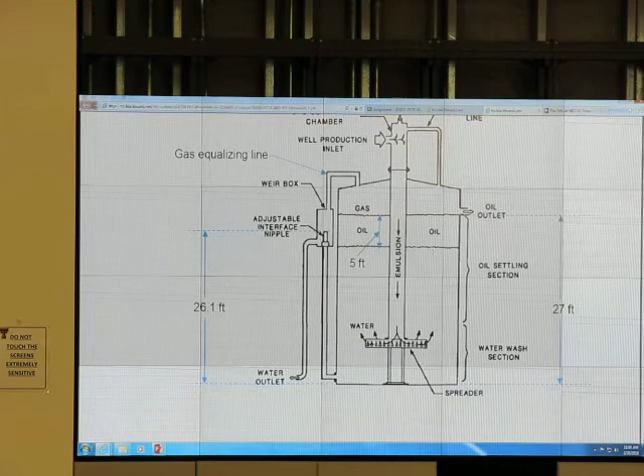This is not exactly the same as last year's exam, but last year's exam solution is available. So this time I add a gas equalizing line. Second problem: the gas equalizing line gets plugged. And we calculate oil height or something.

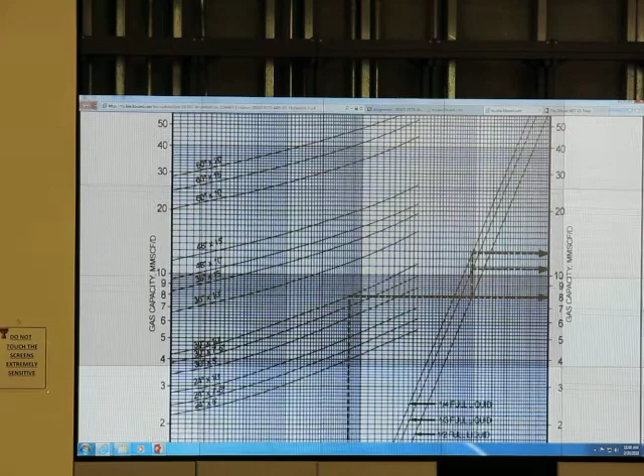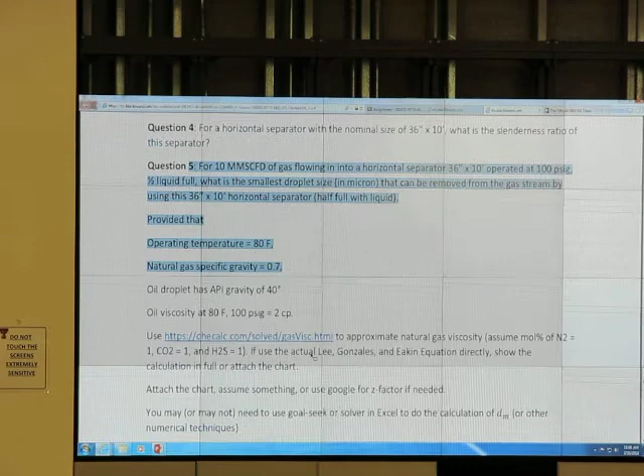Next one is about using the chart. This can be done very quick. The last one, number 4, let's calculate slenderness ratio very quick. The last one is somewhat difficult, but it's similar to what we have in class. Each question is worth 2.4. If you get more than 10, your score caps at 10.

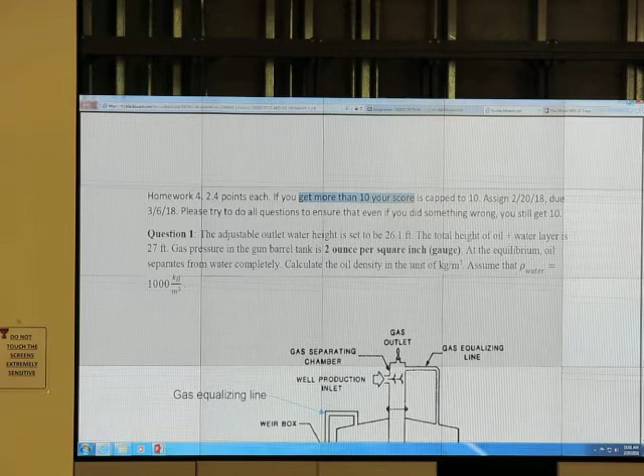Okay, good. Who missed the field trip? Everyone went to the field trip, right?

Last time I made a mistake talking about how to do this BS&W. When we add toluene in, we have to shake first. When we shake, we spin it. The one with high density goes to the bottom, the low density goes to the top. It doesn't mix by itself.

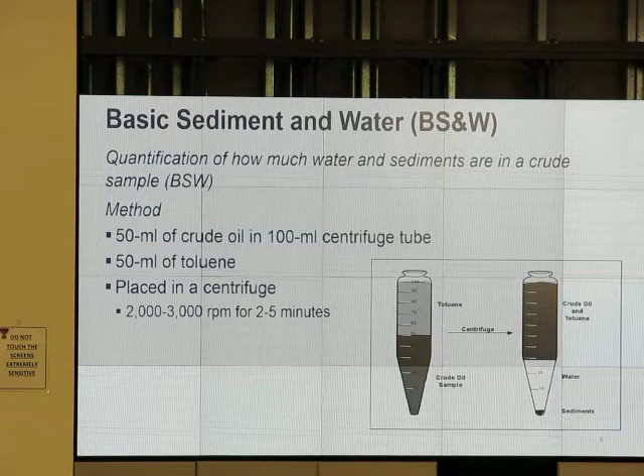The reason we don't use water is because water doesn't decrease the viscosity of the crude oil. But toluene mixes very well with crude oil and decreases the viscosity, making these things separate quickly. So we can use toluene, hexane, and something else.

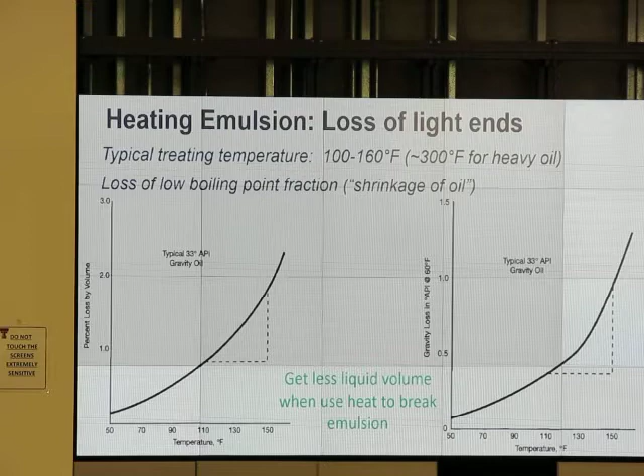In NYMEX rulebooks, New York Mercantile Exchange, the blend of West Texas Intermediate, North Texas Sweet, Oklahoma Sweet, South Texas Sweet shall have the Reid vapor pressure less than 9.5 psi at 100 Fahrenheit. So this is for safety when we ship this crude oil by train.

This is for safety purpose. This is not the rule, okay, but it comes from the crude oil contract. If we have Reid vapor pressure more than that, they don't buy it. Reid vapor pressure has to be less than that.

What is that about, 9.5 psi? I Googled it and found that they heat it to 100 Fahrenheit, heat it to 100 Fahrenheit, and if the vapor pressure is less than 9.5 psia, it is okay.

Please recall that when vapor pressure equals 1 atm, that is where the liquid phase reaches the boiling point. For example, if water vapor pressure equals 1 atm, it is boiling. So that's Reid vapor pressure.

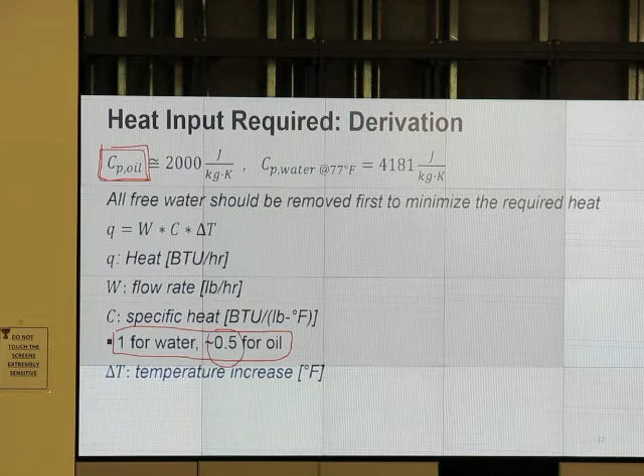CP? Specific heat capacity, correct. So for water, it's 1 BTU per pound per Fahrenheit, but for oil it's 0.5 BTU per pound per Fahrenheit, right? So that's why we have 0.5.

And we have oil flow rate. Is that oil flow rate? Yes, oil flow rate. And we have water flow rate.

Not flow rate, I'm sorry, heat that used for oil. That one is heat used for oil. That one is heat used for water. When I go back, capital Q, this is heat or flow rate, okay.

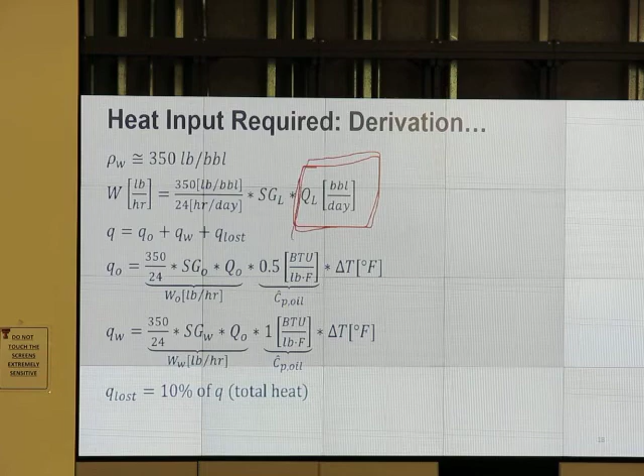I'm sorry, capital Q is flow rate, volumetric flow rate, barrel per day. That's capital Q. So we have volumetric flow rate for oil, volumetric flow rate for water.

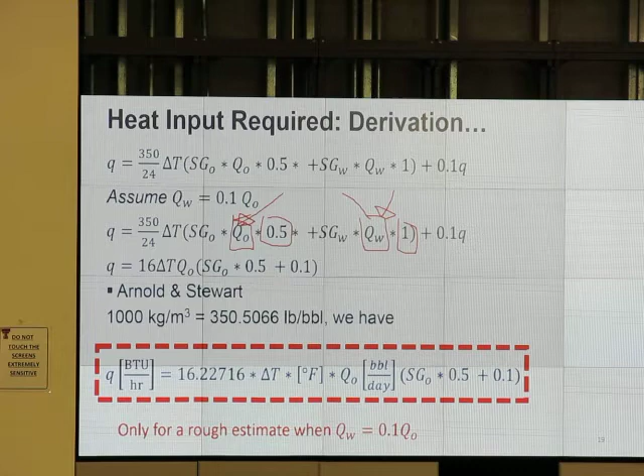Next, we want to combine that volumetric flow rate for oil and volumetric flow rate for water by using the water cut concept, volume fraction.

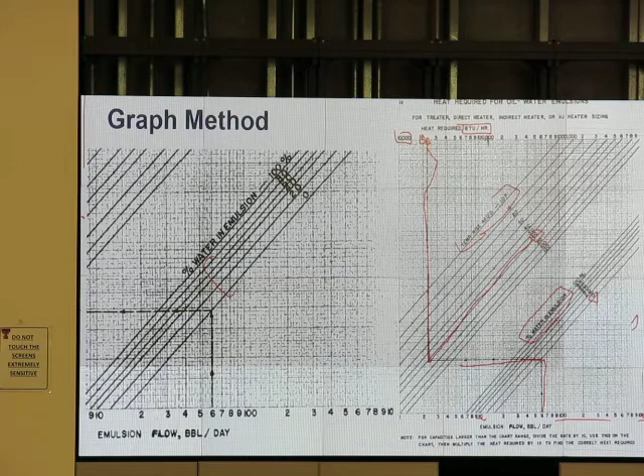Last year we had an exam on this, and the input flow rate was not 60, not 600, but like 2,000 or maybe 3,000 barrels per day. 3,000 barrels per day is beyond the chart - you see, the horizontal axis ends at 1,000. What do we do for 3,000?

Get in? No, I remember there's two people who get apples. Paul, you got an apple, right? Yeah, on Saturday.

How does it taste? It tastes good? Okay. So if I have a flow rate of 3,000 barrels per day, can I use this chart? Yes or no? You don't think so? Okay. Who else got an apple? Yes, you can. Yes, okay.

How do we do it? Note at the bottom: for capacity larger than the chart range, divide by 10. Everyone hear him? 3,000 - we divide it by 10 first, 3,000 becomes 300. Then we proceed as usual. When we get the result, we multiply by 10. For capacity larger than the chart range, divide the rate by 10, use this on the chart, then multiply the heat required by 10 to find the actual heat required. Last year when I printed the chart, I also included that statement, but students still couldn't do it. So this time I have to say it very clearly in class. So if it is beyond the chart, read the note, and then you can do it.

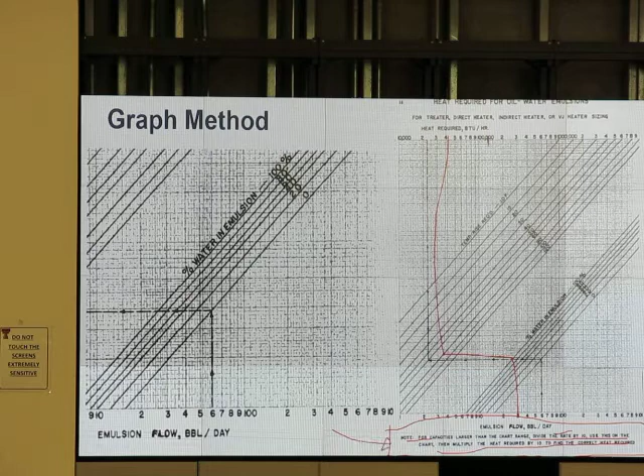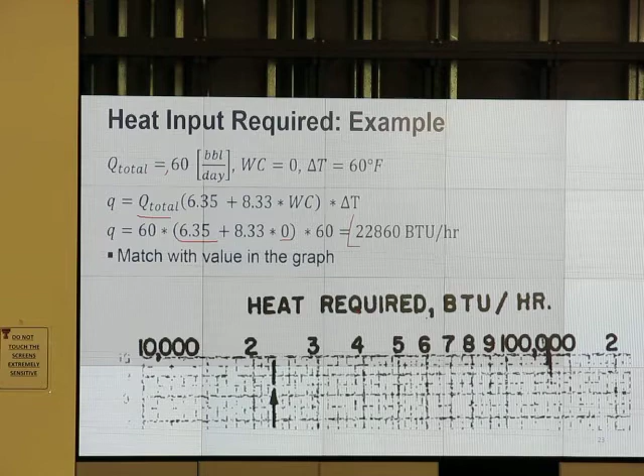Okay, that's the heat requirement based on the chart. Q total, I substitute the values: Q total for 60 barrels per day and water cut of 0, I get 22,800 BTU per hour, and on the chart I get about the same. Done - that's the heat requirement. How much do we heat?

For loose emulsion, we heat it to about 100 to 120. Moderate emulsion, maybe 120 to 140. Very tight emulsion, we heat it really hot. In addition to this requirement, this guideline, we may decide to heat it a little hotter to separate some light ends out so that we meet the Reid vapor pressure requirement of 9.5 psi at 100 F. You agree?

Even though we have loose emulsion, they may decide to heat it a little hotter than usual, so that when they sell the oil it doesn't have too much light end. If it has too much light end, the vapor pressure will be high, so they kind of remove the light end out. You got it? Yes, okay. In addition to this guideline, it may deviate from this because we may need to remove some light end to meet the true vapor pressure requirement.

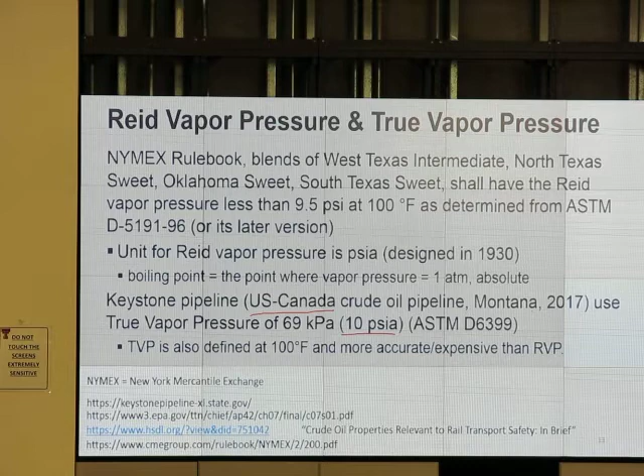Think about the true vapor pressure requirement. If you want to sell to Canada, that's Canadian oil, right? That we put - import oil from Canada - we use 10 psia, and this requirement of true vapor pressure is from 2017, it's new. But that guideline that you have is from many years ago. It also depends on what kind of treater we use. If we have a downdraft flow treater that has a lot of trays - if we have a lot of trays - some units don't have much tray.

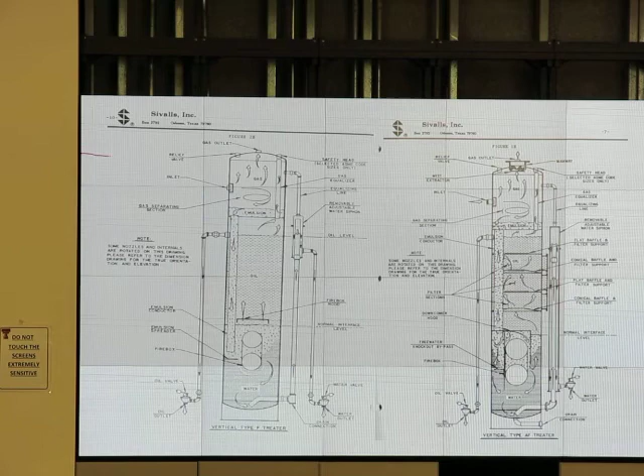So some units don't have much tray in here, but this one has more tray. This means oil will stay in there longer, it will stay inside longer. So we may not need to heat that much.

So she was saying, hey, if we buy a little more expensive unit instead of a regular unit, if we pay a little bit more and have the downflow treater, we don't have to heat much. We still get the same separation. Not needing to heat much is good, right? We don't have to pay for a big firebox rating, we don't have to use too much energy. So this is the benefit of the downflow treater.

So in addition to this guideline, it also depends on what is inside the separator. If there's a lot of tray, or some kind of special design, we may not need to heat that much.

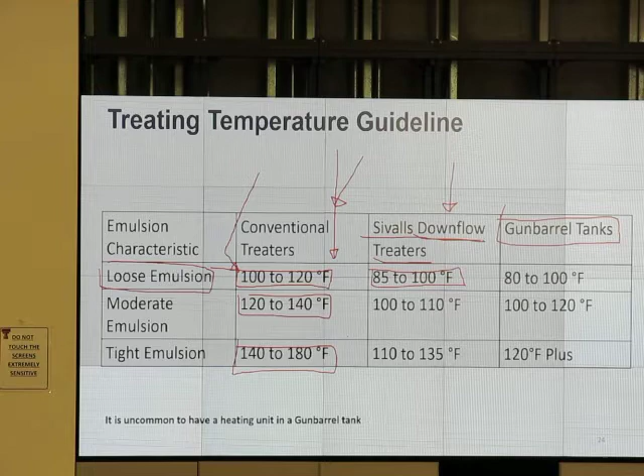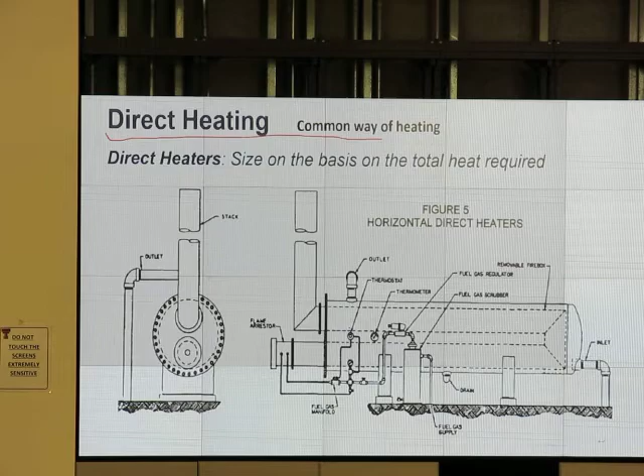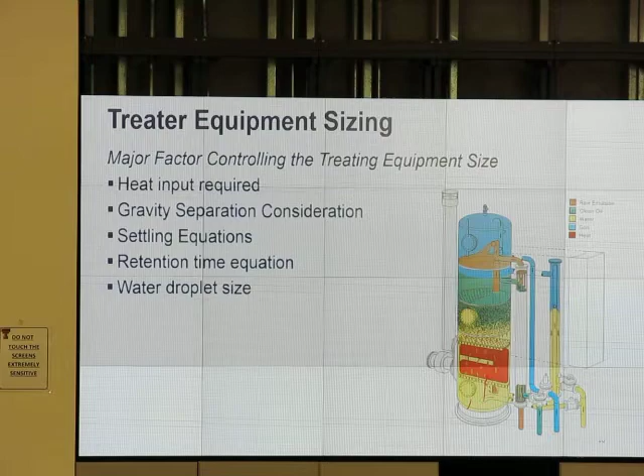Indirect heating is the same thing that we use in the line heater. We heat water first and use the water to heat the coil. That's indirect heating, so line heater is indirect heating. The common way of using a heating method for heater treater is direct heating. Of course, there are some uncommon ways of indirect heating.

Okay, Daniel, you got it, did you? Yeah. No? Okay. So why do I want to do indirect heating for emulsion? Any particular reason? Who has the answer? To have the answer, you may need to look in the next slide or something.

It's more corrosive, okay. Indirect heating, heater for corrosive fluid with cast iron coil. If the fluid is very corrosive, we may not be able to heat it directly. So we want to protect the heating element and protect the other part of the tank, so we have to use a cast iron coil, and we heat water first and use water to heat that oil.

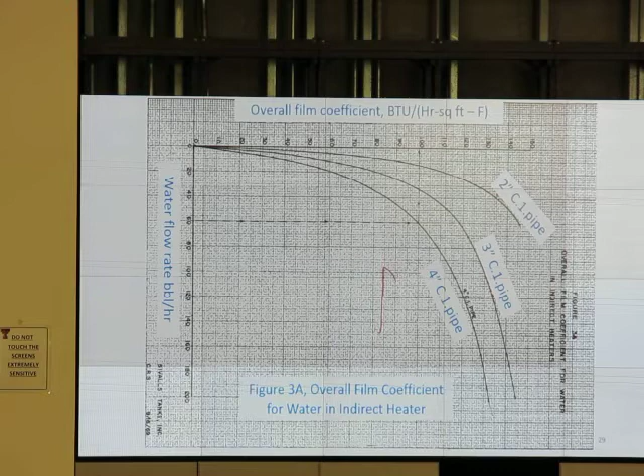So that's why there's a U value chart for oil film coefficient, and film coefficient for water. So we have a coil like what you have seen in heater treater, and we calculate the film coefficient and do the same thing that we did for heater treater. This is uncommon, it's not in the exam, but just so you know we can use cast iron and do indirect heating too. But the majority of units use direct heating.

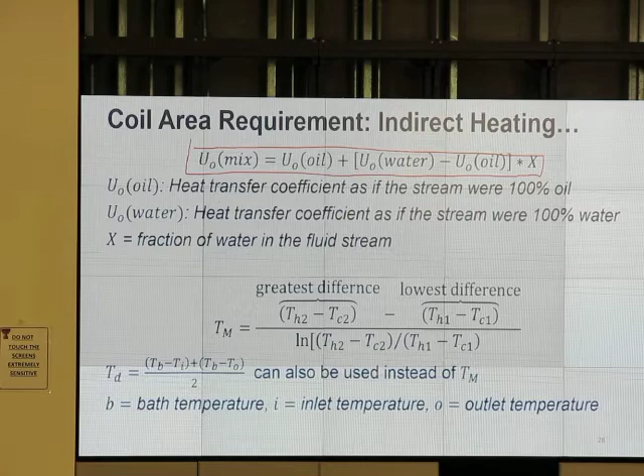And if the oil contains both oil and water, we use a chart to get the U value of oil, and a chart to get the U value of water, and then combine it using this. The rest of the calculation is the same as in heater treater. It's not in the exam, but just so you know. Direct heating, though, yes.

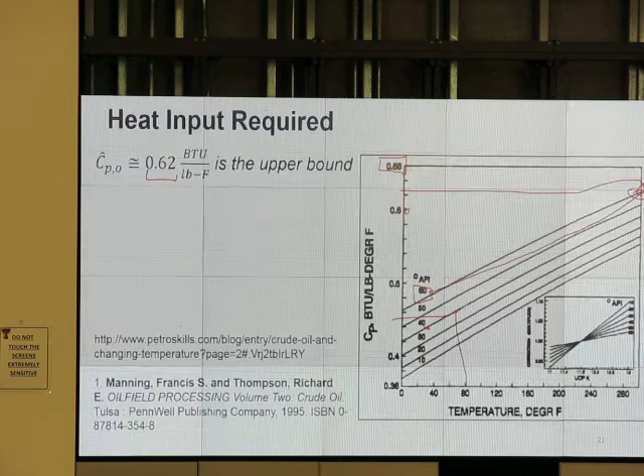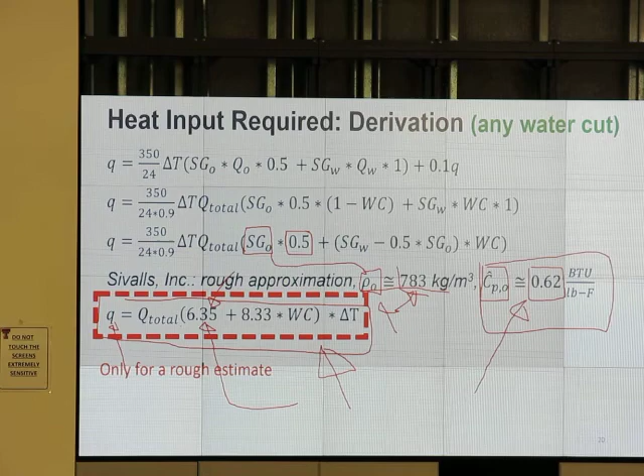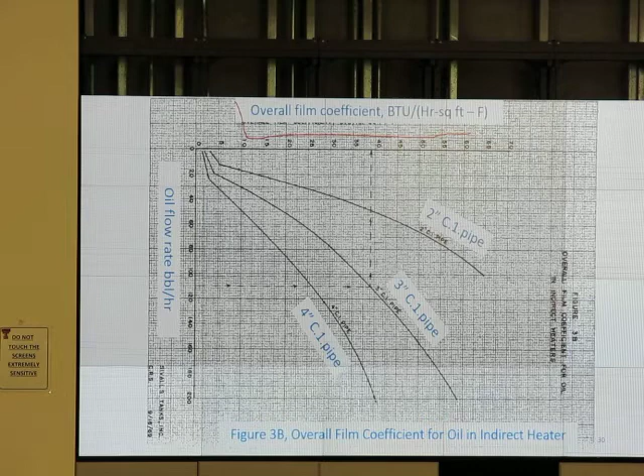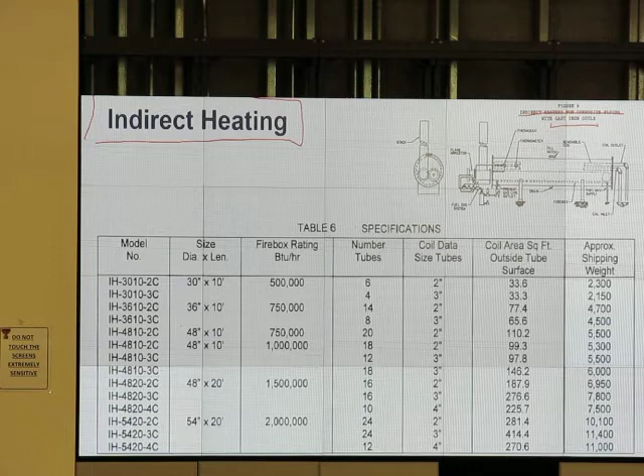Next part, coil area requirement for indirect heating. This is the same as heater treater, it's not common, so we skip. This part is film coefficient, also not common, so we skip. Indirect heating is similar to line heater. We typically don't do indirect heating unless it's corrosive fluid.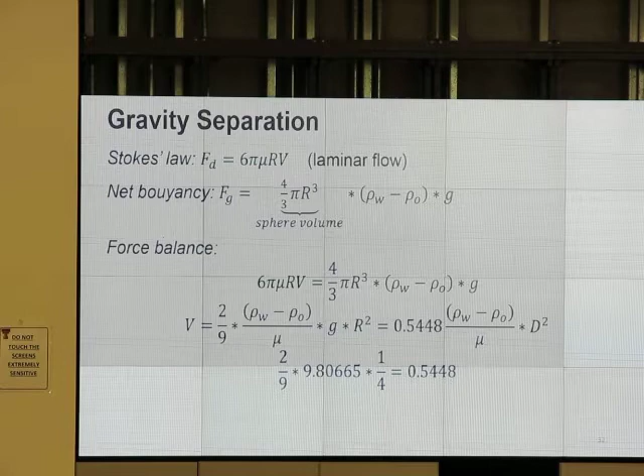Use the Stokes' law, net buoyancy. This is the same part as in the separator part, and eventually we get this value. This concept is also used in the heater-treater unit, to find out what is the speed it goes through if we want to do any kind of approximation. This is field unit, SI unit, field unit.

Settling equation for horizontal case. So in this case, water droplet sinking velocity equals oil phase moving up velocity. This is used for heater-treater. Look, they use the same equation, but it's a little different in derivation.

Okay, based on what is the cross-section area of the flow. So we have emulsion coming in, water, something. The derivation is the same concept. We don't have this in the exam, and you don't really use this one here, but it's already in the homework for the case of horizontal separator, if you recall.

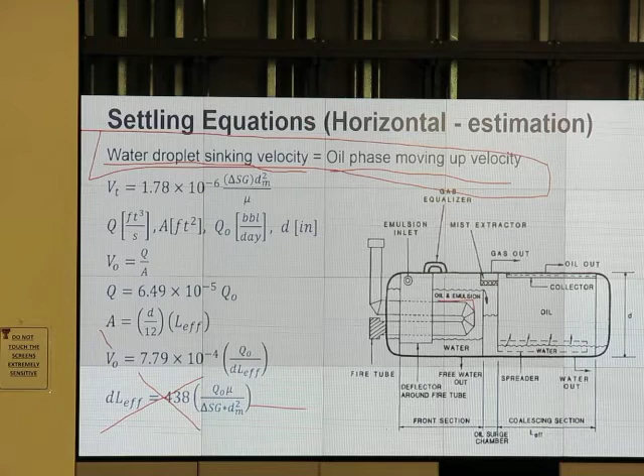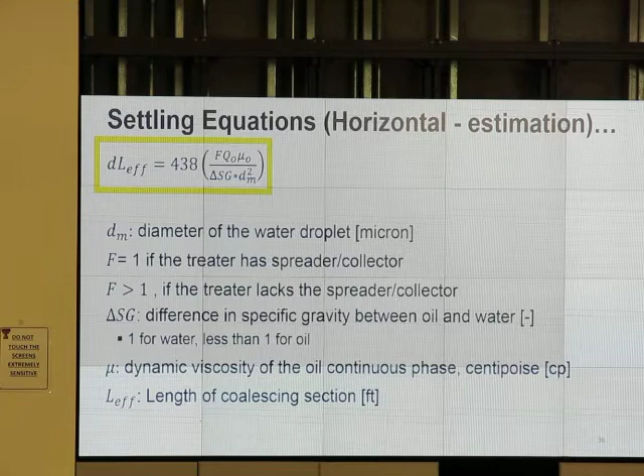Settling equation. For vertical estimation, this again, we just keep this for your information. We don't really use it in the exam or anything, but most of the time we use the chart.

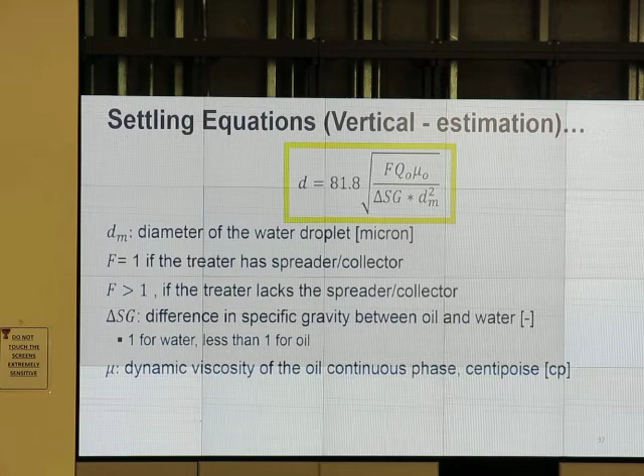Treater sizing. For vertical treater size or gun barrel, we can use this equation. This equation needs the information on viscosity. Previously we had the equation W Q equal to 3 point something plus H point something. That is for firebox rating, but it doesn't tell us about the size.

This thing tells us about the size. What size do we need? If we have vertical treater, what is the diameter that we need? If we have horizontal treater, what is the height and length? This equation is also used for gun barrel tank. The way to use it is W, our capacity, how much we want to put in. C, constant from the next table. The difference in specific gravity, we need to know viscosity.

Viscosity is in the unit of, what is viscosity? I think it's centipoise. And put everything in. Then we can get the W value.

This is a question for the case where we know the emulsion flow rate. Maybe 500 barrel per day, something. So that W, I think W is the same unit. In the exam I will tell you the unit, but here I just pick it up. So we have the diameter. When we know the flow rate, we know all three properties, we can tell what should be the size of the tank.

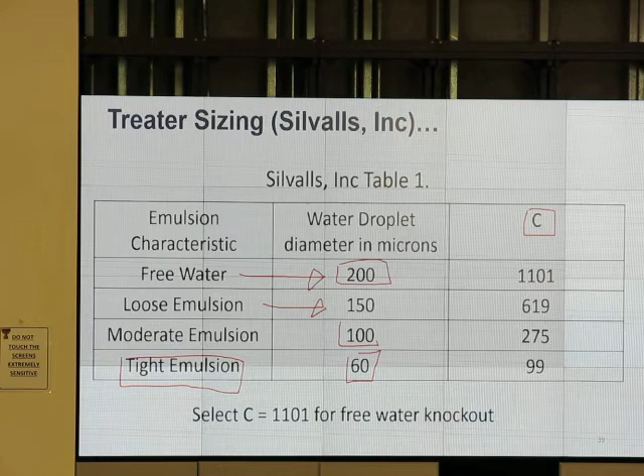So for the case of not-tight emulsion, having some free water or loose emulsion, it doesn't need much retention time. We can have a little smaller size. Okay, this is the way to do the calculation. W is the oil capacity variable.

Use mu W instead of mu O if water is the continuous phase. The part on the bottom is for the continuous phase viscosity. When we really do it, use a chart. That part is the equation used to make the chart. So this is for the actual estimation. We can use that for treater.

First step, we specify the specific gravity of the water that we have. Then we go up and read this part, gravity of oil, API at 60 Fahrenheit. What is the oil API gravity in this example? It's about 35. Then next step is what is the treater temperature? How much is the treater temperature? So we stop at about 140. We try to treat it at 140.

And then we go up and see what kind of emulsion: is this a loose emulsion, moderate emulsion, or tight emulsion? So moderate emulsion is that one, so we go up until moderate emulsion. Then we try to say, what size do we want to use? Do we want to use a 6 by 20? So this is the size of the treater. Then we stop at the size of treater, and we can tell how much is the oil capacity, or emulsion capacity, that it can handle.

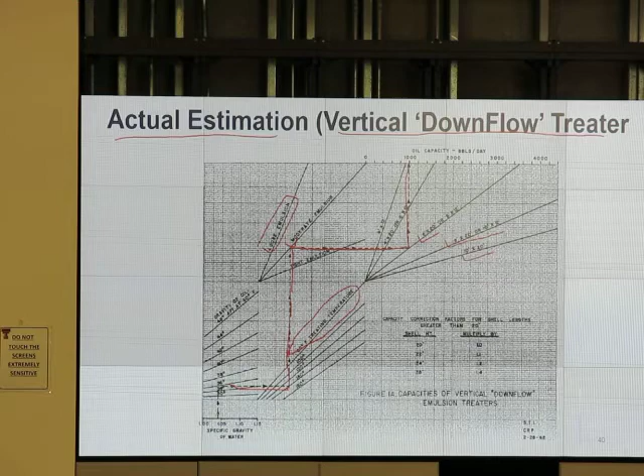Capacity correction factor for the shell length greater than 20 feet, we may have to multiply by some value. I put it here, alright, just use a chart. This is for vertical downflow chart. If we have a conventional model, use a conventional model chart, just follow the line.

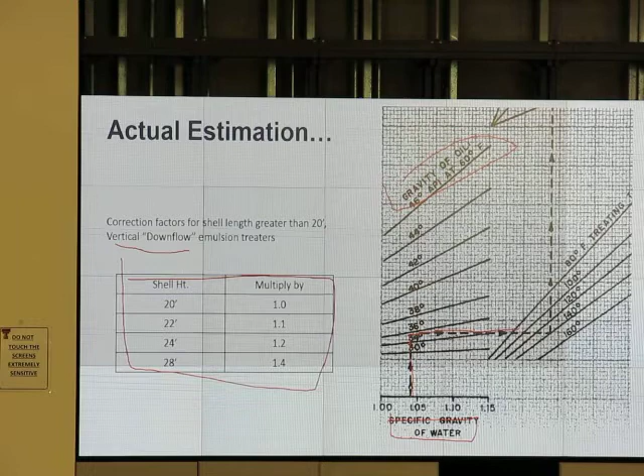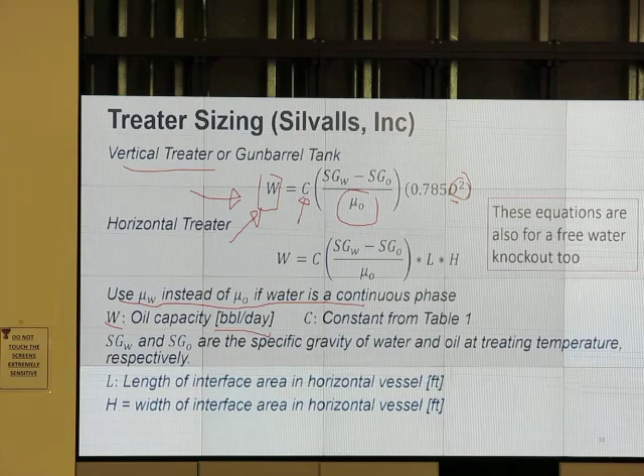Where do those lines in the chart come from? It is from this kind of equation. So when we have the equation, maybe one day you will be the one who makes the chart, not just use the chart. That's what it is, okay?

Go up, okay, moderate emulsion, turn right, and we have 6 by 20 feet. So if we have 6 by 20 feet, it can handle oil capacity of 1,000 barrels per day. If we have more than 1,000 barrels per day, let's say we have 1,500, we may need to use a bigger one, right? Good. This is how to size the separator.

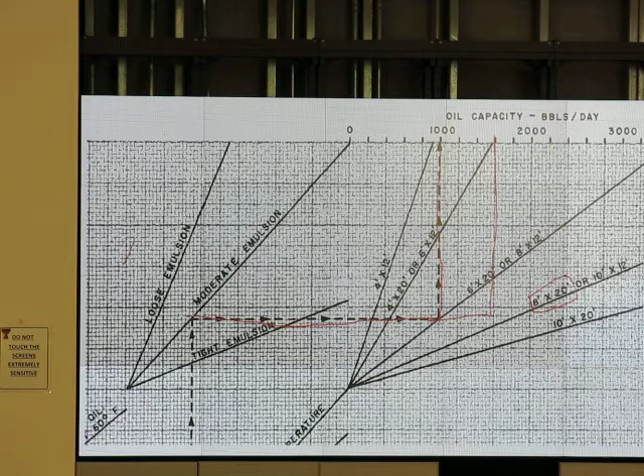Retention time calculation. One thing we need to know is how much is the retention time. Use this equation. Gideon, where does this equation come from?

Correct, correct. So it's a very easy equation, but it's important, right? We have a relationship between flow rate, volume of the separator, and the time. So this tells us that if we have a high flow rate, we may need more volume so that we can have more retention time of liquid inside.

If you want to calculate retention time, just put T over that side and it will be 1440V over W, and this is a unit. Do you know how to derive 1440? Of course you do.

Let's say we do it in SI. In SI units, we have volumetric flow rate, cubic meter per second, equal to volume of the separator in cubic meter divided by time in second. Or you can use, instead of cubic meter, barrel divided by second. So volume in barrel divided by second, you see, this is not minute.

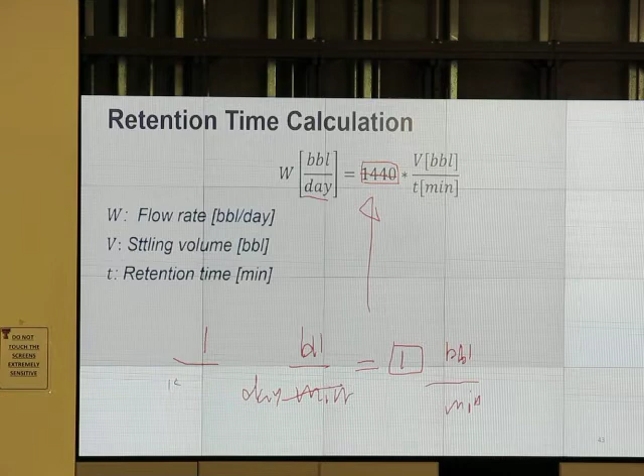So I multiply by 1, so this one is 1440 minutes per day. So day cancels with day, and at the end I still get the same minute. So I move that 1440 over to that place, then I get that equation.

Maybe not you, but last year or two years ago, some students didn't practice and they got 1 over 1440, and they got zero. Don't try to get zero, try to get it correct.

Retention time guideline: gun barrel tank 8 to 12 hours, treater 1 to 2 hours, free water knockout in the order of minutes. Look at the unit. Hours means big, a big retention time. Treater has less retention time, so it's smaller, and free water knockout is even less. This is a guideline. If we have carbon dioxide or something, you may have to double the retention time. Always check the retention time for fluid in the vessel to see if it's within the recommended range.

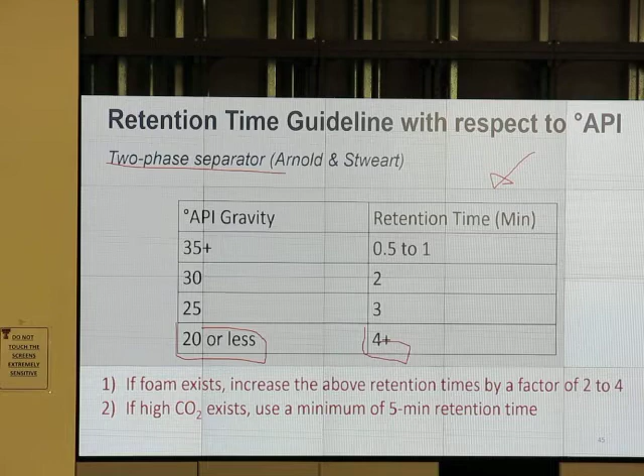If you have foam, two-phase separator, I think we have this slide already, with respect to oil gravity. When it becomes heavy, we need more retention time for the two-phase separator. A two-phase separator just separates clean gas out and emulsion or water or liquid at the bottom.

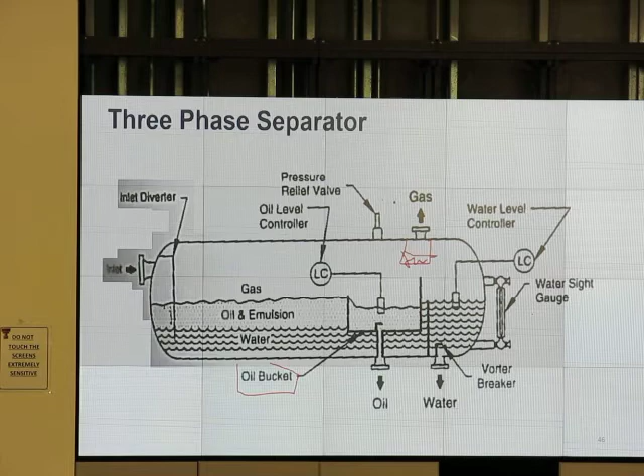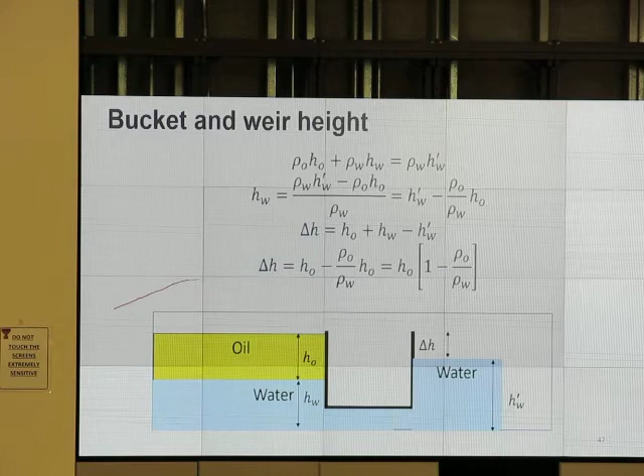Three-phase separator, you have seen this in the field trip and in the lab. On the exam, sometimes it's about the oil bucket, water bucket, inlet diverter, and pressure relief valve. If we have that mesh, we call it a mist extractor. If I have this picture and delete some of the words, you will know what it is. This is the same as in the lab notes. When you do the lab, you don't have to return anything, but you have the hard copy of the lab note, and inside there's this kind of equation.

Gun barrel: there is communication between this adjustable interface nipple and the gas pressure over here.

Who else wants to answer the question? Volunteer, who wants to volunteer to answer the question? Do something that is very good, do something good for everyone in this room. Raise your hand, please. Yes, Paul. What is the pressure that you think is in the gun barrel tank? How much?

Pressure in the gas phase, how much should it be? 10 psi? 20 psi? 100 psi? What did you see on the East Campus? Do you remember a small model in the workshop? What pressure rating does this kind of tank have? 40 psi, ounce, is that what you want to say, Mr. Akrobong? It has to be in ounce, not psi. The one in the workshop at the East Campus is rated at, I think, 16 ounce. So it's in ounce—if we say psi, it's wrong. Typical value is 2, 4, maybe 6, or maybe 8 ounce per square inch, not psi. Psi would be too much. That's what you need to know.

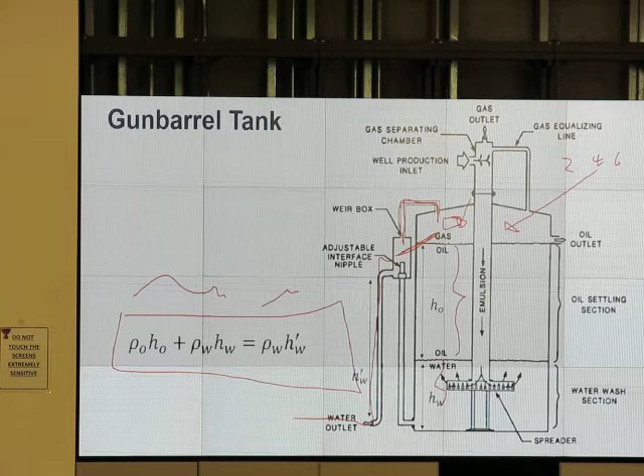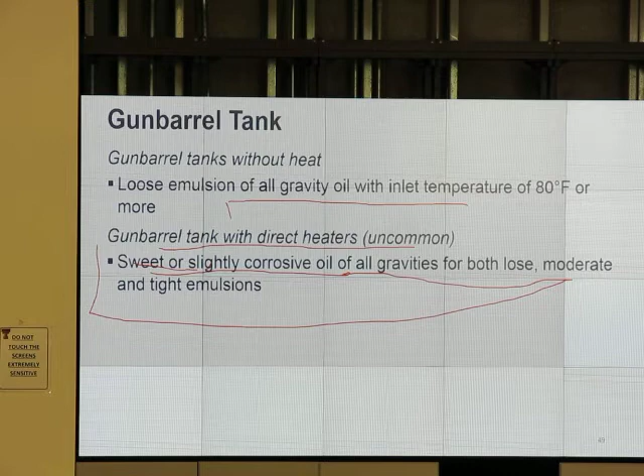But in West Texas you don't see that.

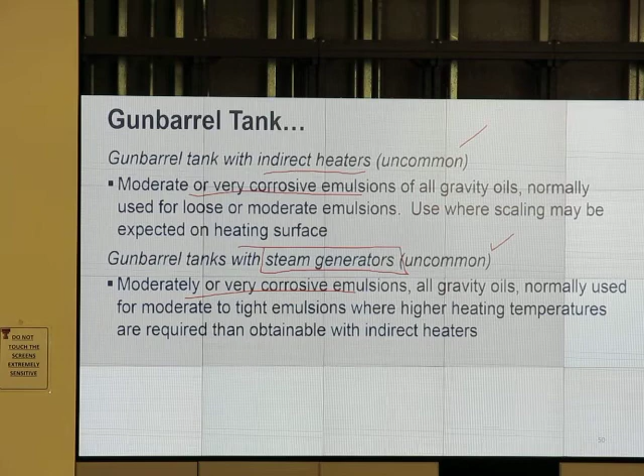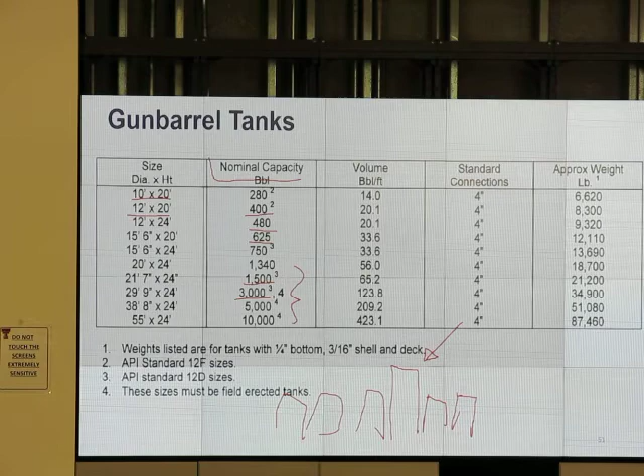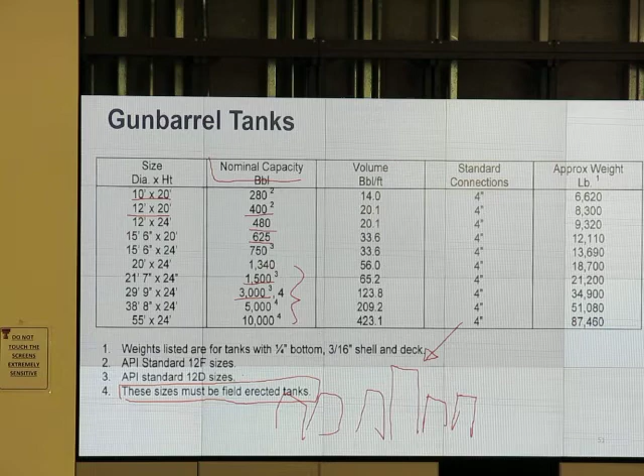So this is gun barrel sizing. If I buy a certain gun barrel tank, say 10 feet by 24 feet, can it handle 4,000 barrels per day of oil?

To answer that question, we do this kind of thing. Go up, see what the oil gravity is, what temperature we want to heat to or whether we don't heat at all, and whether we have loose emulsion, moderate emulsion, or something else.

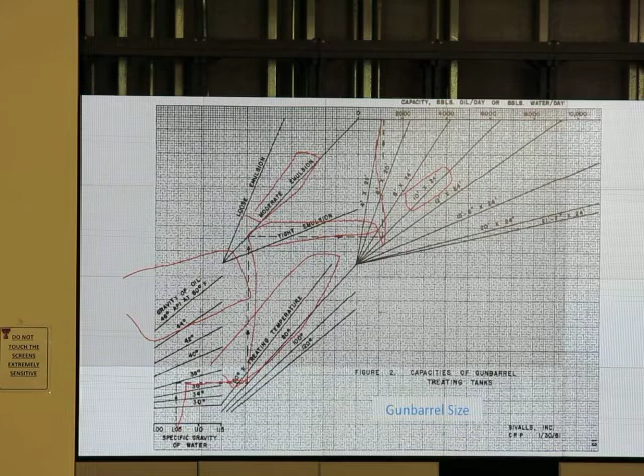Then we go up. Sometimes in Colorado, the tank is buried underground. It's even buried to keep heat in it. Different operators do several different things.

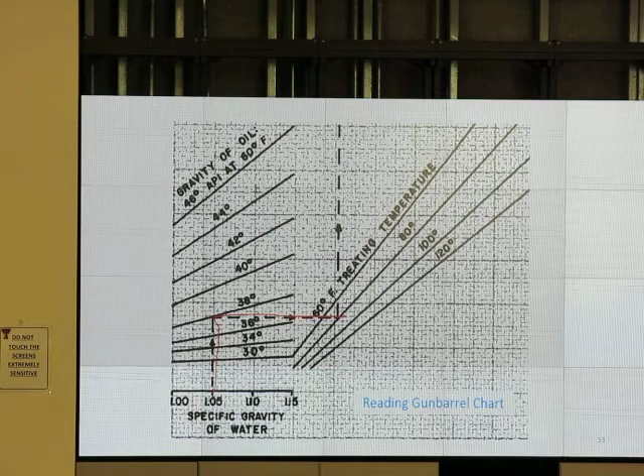The method to do this chart is the same. Go up to the oil gravity, turn right to meet the temperature requirement, go up again to see if it's loose, moderate emulsion or something, go right to see the tank size, then go up again to read the oil capacity.

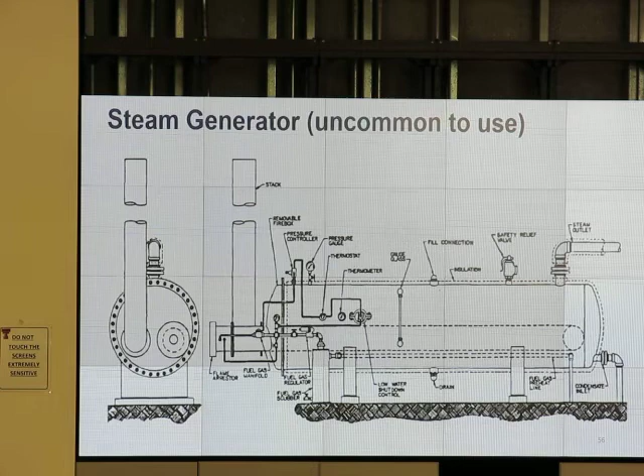Very easy. Steam generator is not commonly used, so we skip that. Heat loss from the vessel, though, we don't skip.

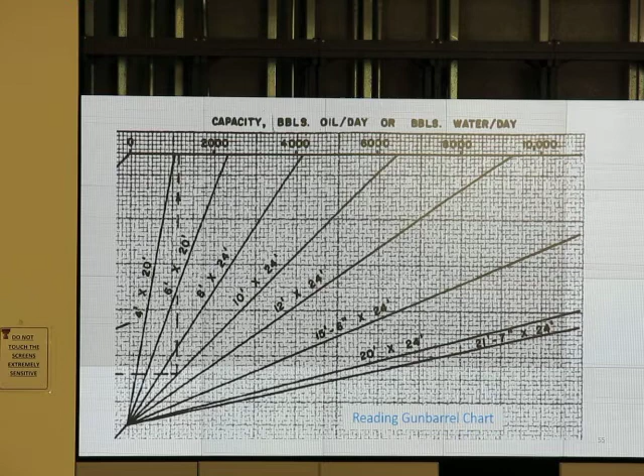Question: do you use capacity of oil, or are you doing total liquids on those charts? Oil per day in barrels, or water per day? Any recommendation, or do you just use either? I think I'll read more of Sivalls' textbook and tell you.

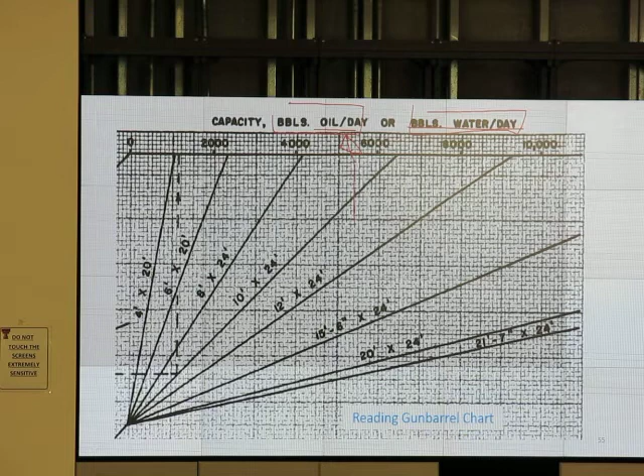I think we should not have much water cut when it goes to the gun barrel tank, right? We may have like 10% going to the gun barrel tank, or do we have a lot? Well, actually, water will help you in a gun barrel tank, but water retains better than oil will.

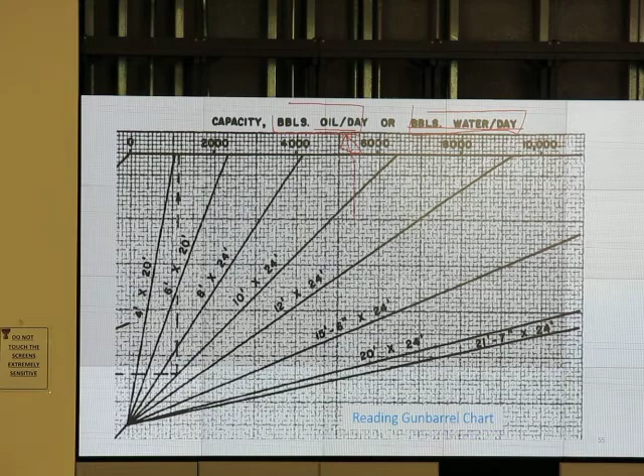So, my own experience with gun barrels is about that big, but I would probably size it on oil treatment. Using a chart is a very good way to get it.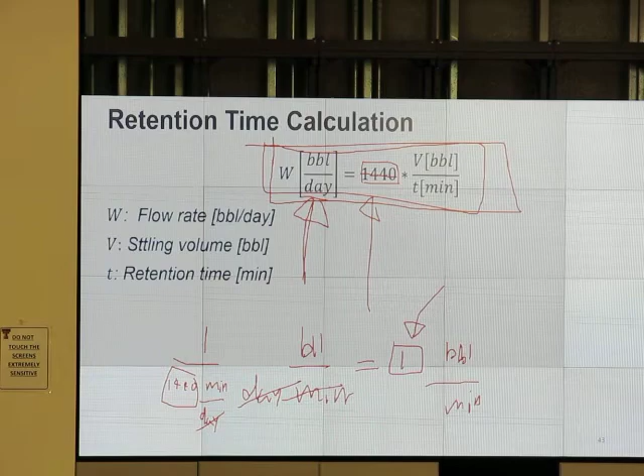Make sense? You may double check with this and go with the one that is more conservative. So you may end up doing it twice and using the bigger number. That will be good enough.

And if I give you a tank size, can I tell what kind of droplet I can separate? Is there a way to know that? Yes, use the settling velocity equation.

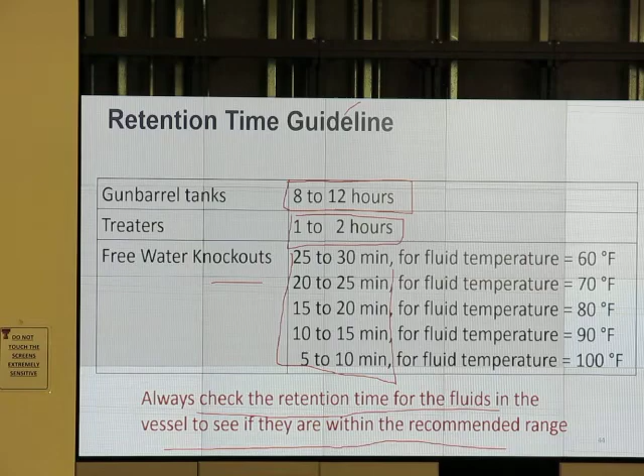This equation can tell us the velocity of an oil droplet in water, provided we know the diameter. Do you remember how we derive this? Yes — this is settling velocity.

So if we know the height of the gunbarrel tank and we know the velocity, we will know the amount of time required for the droplet to travel upward. For a quick look at the gunbarrel tank, we use the chart; for more detail, we do the actual calculation.

Remember the one we did in the lab? We said, what is the height the droplet has to travel — that's the length — and how much time it takes to go through that. Then we calculate how much retention time we give.

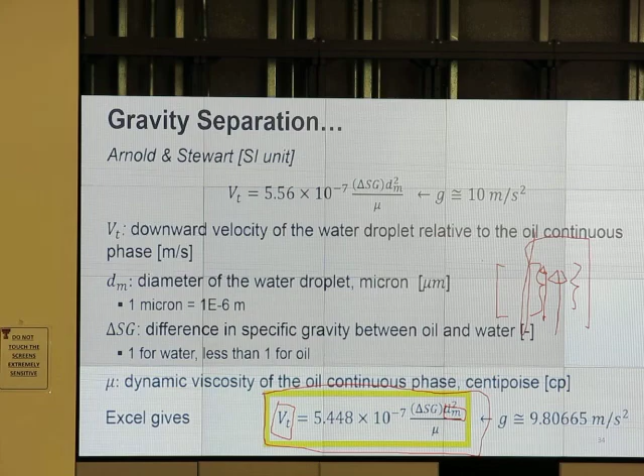So based on the required retention time and the time we give to separate, we can decide if it is big enough or not. That's the detailed calculation using gravity separation. Good?

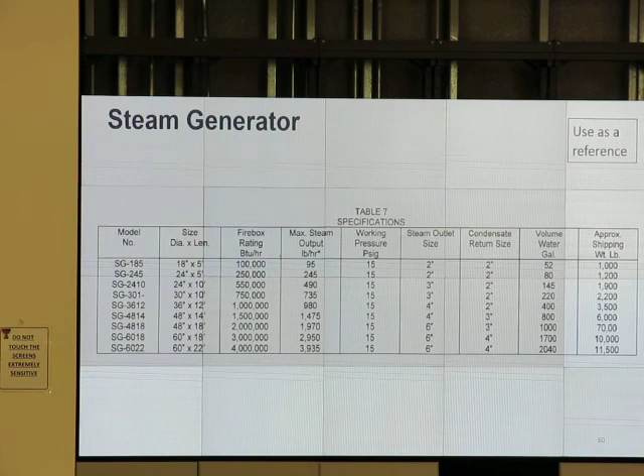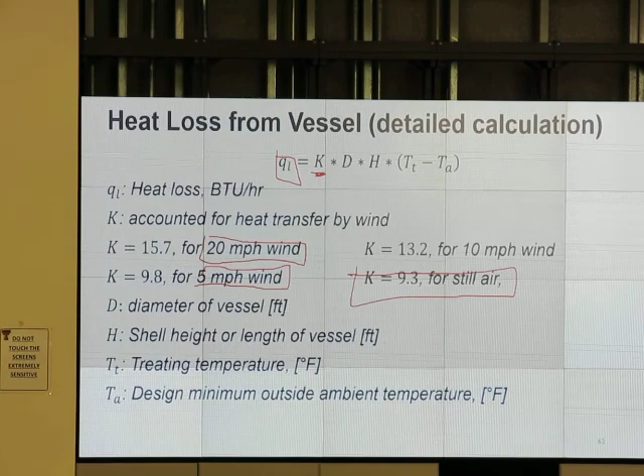Wind blowing — if we have wind at 5 miles per hour, we lose some heat. If it blows faster, we lose more heat. Heat loss in BTU per hour is this constant factor depending on how fast the wind blows. If wind doesn't blow, we use 9.3. Diameter is the diameter of the tank.